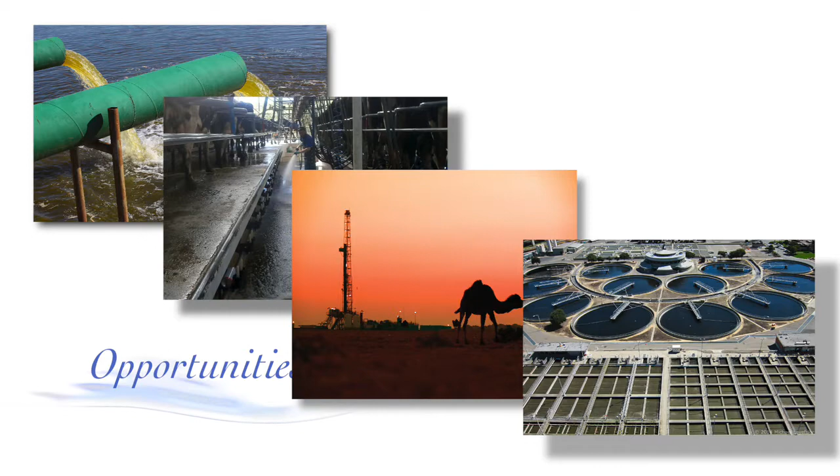Opportunities are mind-boggling. Water from industrial, agricultural, oil and gas, and municipal treatment facilities can now be cleaned and repurposed as needed. The ability to clean water is limited more by our cultural perceptions than by our technological abilities. To be frank, we could take industrial waste, biologically consume the organic matter out of it, and convert it to drinking water.

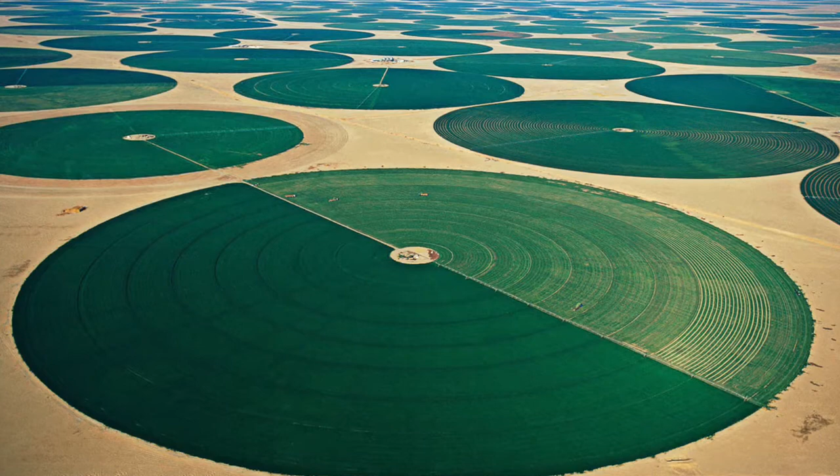It would be safe, have no odor, with minimal filtration, would be crystal clear, and indistinguishable from bottled water. Produced water, water that is a byproduct of oil and gas production, can be remediated and redirected for use as irrigation, potable, or even ultra-pure for industrial purposes. This is not science fiction. We've been doing it for over 20 years.

Zero discharge, our two favorite words. Many countries are presently enacting regulations requiring limited or zero discharge for industrial water. TMD's customer list is a who's who of industrial titans worldwide, some of which we are presently working with to meet these stringent government standards.

We can demonstrate this process and how it will save you money in both energy consumption and disposal, as both are reduced by a factor of approximately 50%. Let's take a look at the process to help you understand how TMD can save you literally millions of dollars and save our environment millions of tons of waste.

TMD has completed preliminary engineering plans for Saudi Paper Manufacturing. Our brief inspection of the facility confirmed our analysis that there will be substantial savings available by the patented TMD technologies. One of the major advantages of the TMD system is the ability to clean and repurpose water. Of course, each level of remediation has a higher dollar cost, but overall, the TMD processes are vastly more economical than present chemical or activated sludge systems.

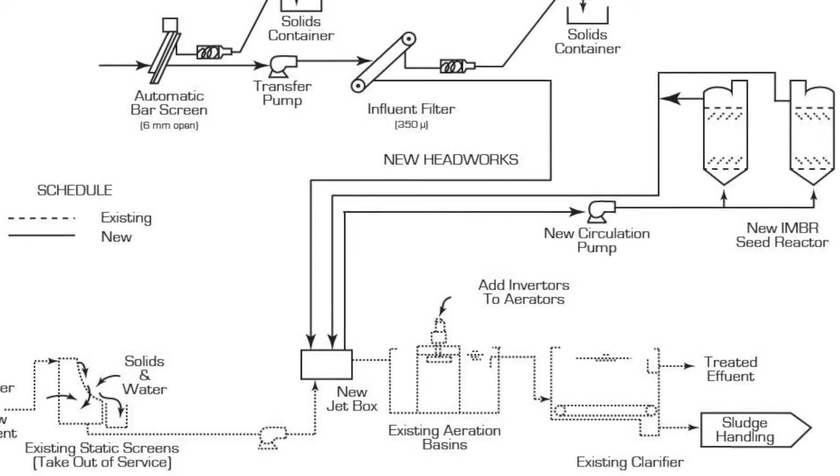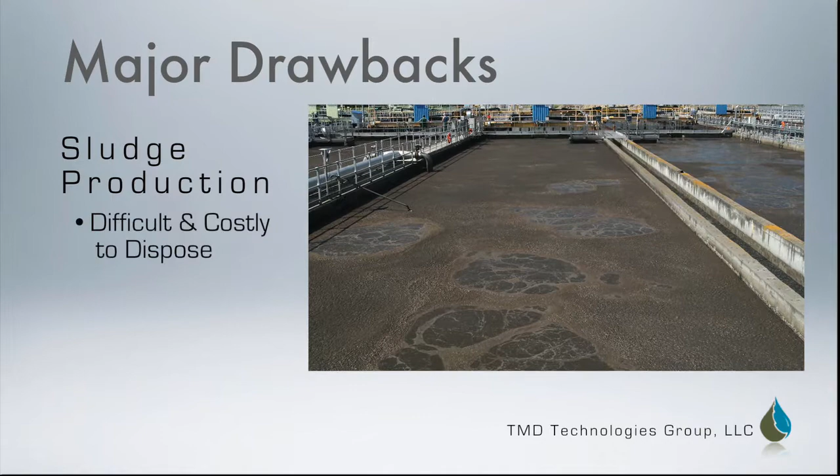A major drawback to conventional remediation systems is they produce substantial amounts of sludge that is often difficult and costly to dispose. This is not the case with TMD technologies. By matching the contaminants to our vast repository of over 11,000 microorganisms, we can virtually eliminate all of the organic matter in a waste stream.

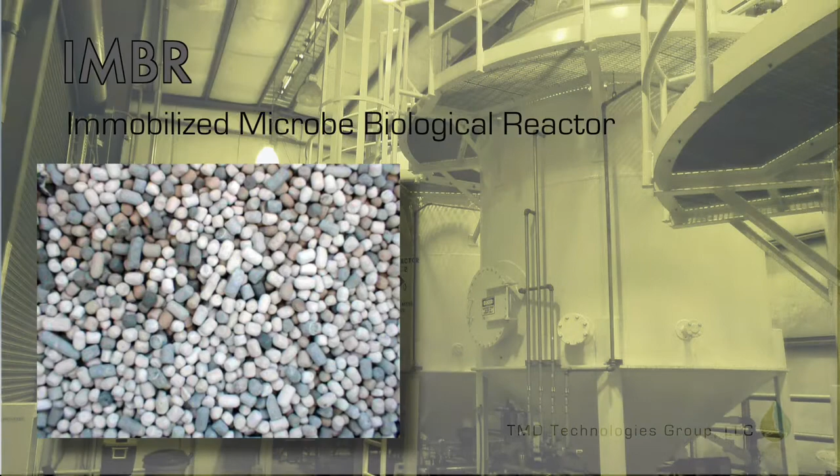Unlike activated sludge systems that require large amounts of decaying microbes to provide living space for their biological agents, the TMD system permanently immobilizes our biologicals in our patented IMBRs. This results in 100% engineered contact and eliminates the need for activated sludge. Our systems are also self-regulating in that if there is not an adequate food source, the microbes become cannibalistic, and if the food source becomes depleted, they will go dormant but will not die off.

Therefore, the only measurable byproduct in a properly operating IMBR should be inorganic solids such as sand or plastic. In short, we provide safe and self-policed condo living for our microbes, while other systems are slumlords.

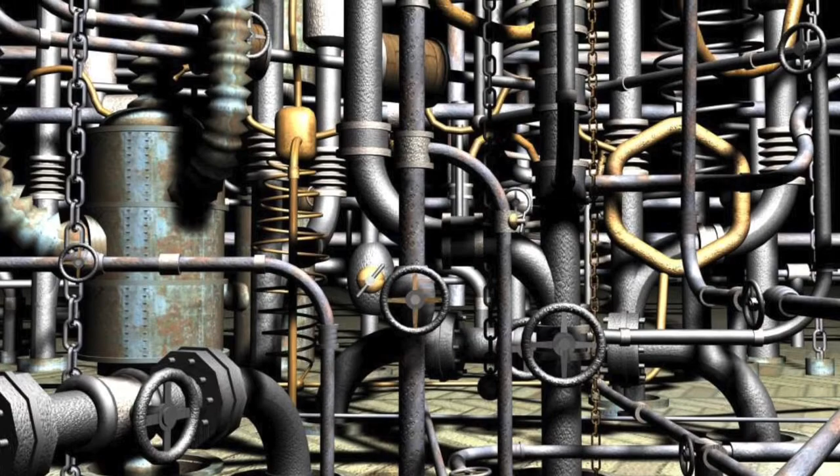TMD's strong suit is system simplification. Many systems installed all over the world in the past 20 years have been made incredibly complex due to available technology of the times. TMD's mission is to analyze a system and replace chemical and mechanical activity with biological activity wherever possible. This approach simplifies all waste systems, saving time, energy, labor, and of course substantial money. Again, biologicals consume, mechanical and chemical treatments simply mask.

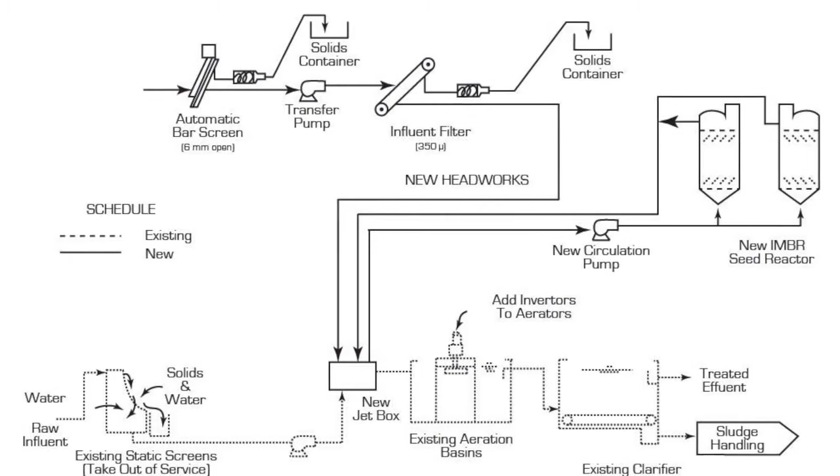Although TMD representatives were only able to conduct a preliminary analysis of Saudi Paper facility, this analysis, in conjunction with years of experience with similar systems, leads us to suggest very conservatively a minimum of 50% reduction of solids. In TMD systems currently in operation, we have reached levels as high as 98% reduction in organic solids.

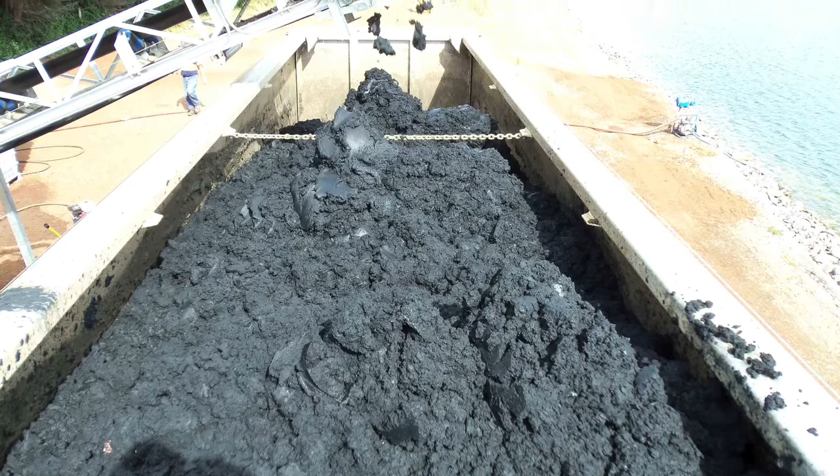In the case of Saudi Paper, this would convert to approximately $2 million savings annually by the reuse of the water and virtually eliminating the need for solid waste disposal. In short, the only solid waste to be dealt with would be inorganics.

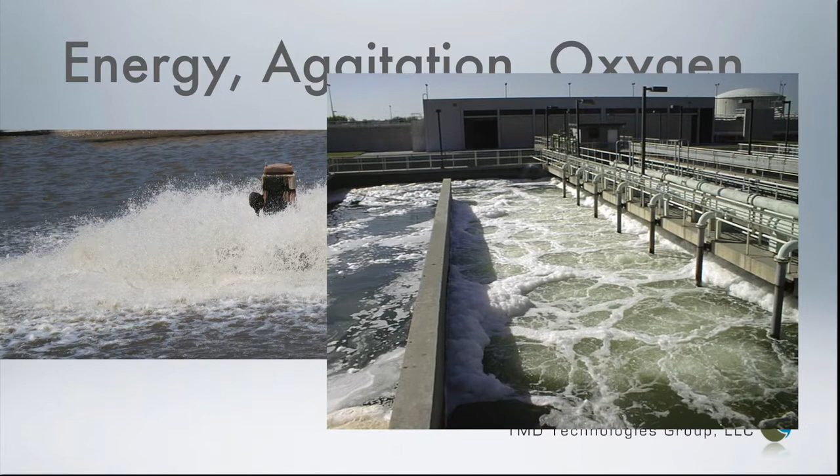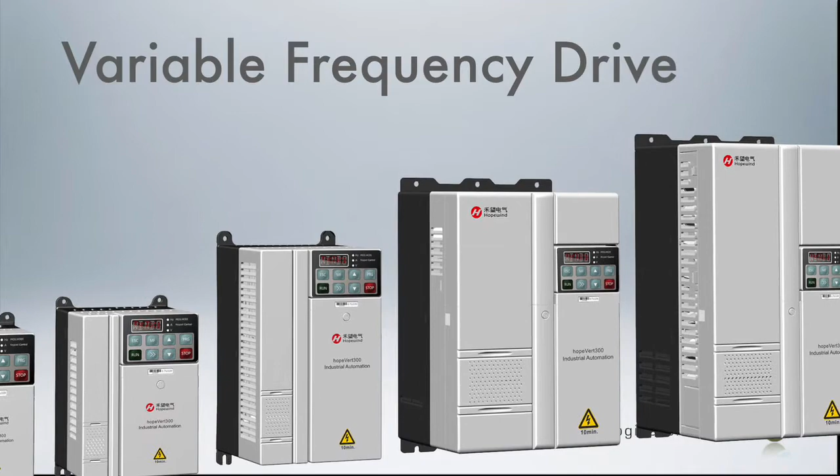The IMBR system consumes a fraction of the energy, agitation, and oxygen required by the present system. This allows for substantial reductions in power consumption through elimination of unnecessary stages. It also allows for the installation of variable frequency drives that offer tremendous energy cost reductions: 50% reductions of biosolids, 30 to 40% reduction in power requirements.

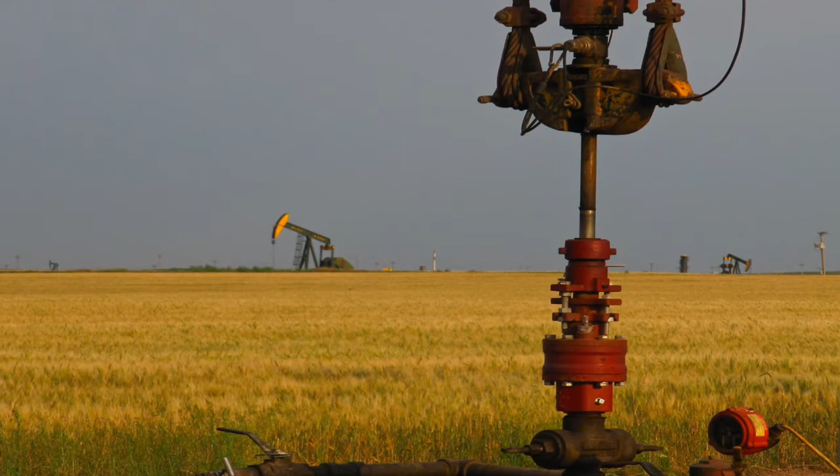TMD's technology produces sustainable, environmentally sensitive, and an economically viable operating environment. Our technology is infinitely adaptable and able to meet the challenges presented by industry, municipal, oil and gas, agricultural, and other industries' waste streams.

Unlike conventional waste treatment systems, TMD has the knowledge, the resources, and above all, the biological inventory to select a toxin-specific organism. Essentially, TMD's approach is to identify the toxins in the waste stream and then match them with the specific organism from our vast U.S. repository. TMD's lab has the ability to recreate virtually any combination of contaminants.

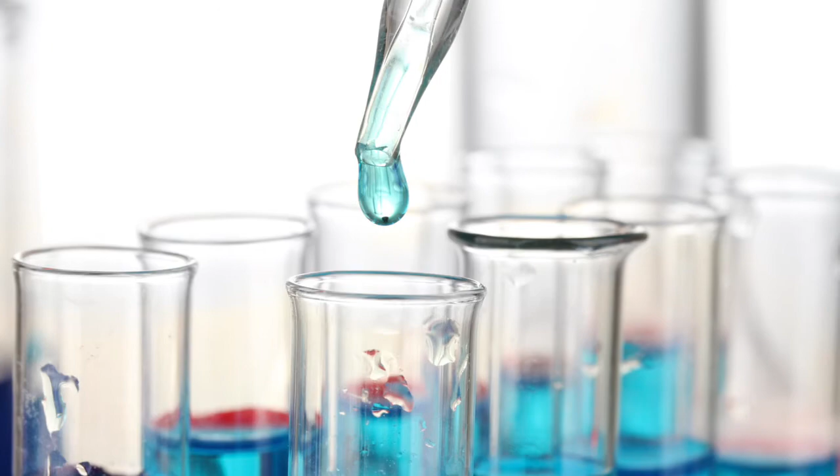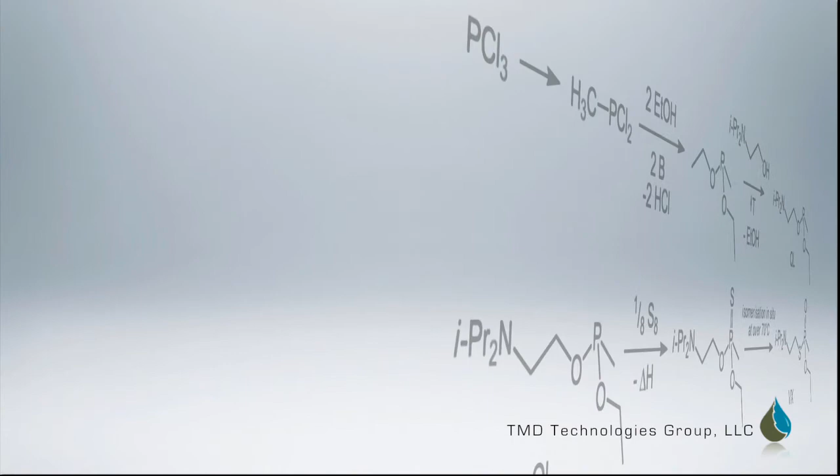We then confirm our biological selection by a real-time test of the effectiveness and efficiencies of the chosen microbes. This is all done prior to the immobilization of the biological agent in the IMBR. All TMD IMBRs are tested prior to deployment to ensure maximum efficiency.

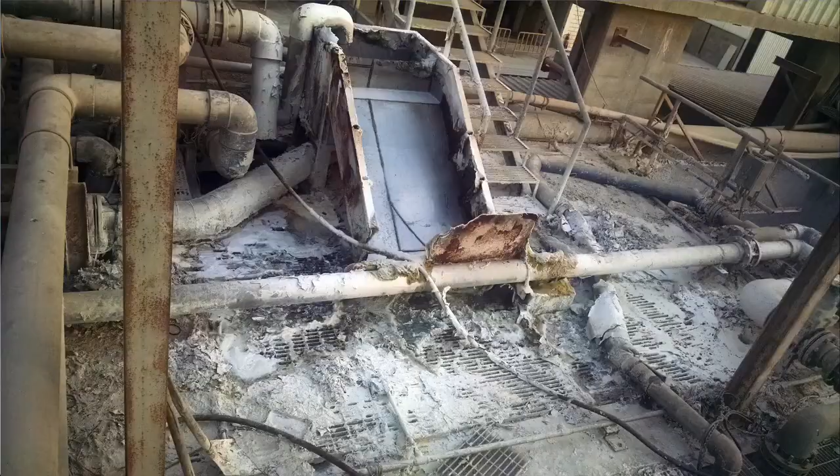Clearly, the Saudi Paper system was state-of-the-art at its inception. However, due to technological advances, many of them developed and patented by TMD, the operation and efficiency of the existing plant can be vastly improved.

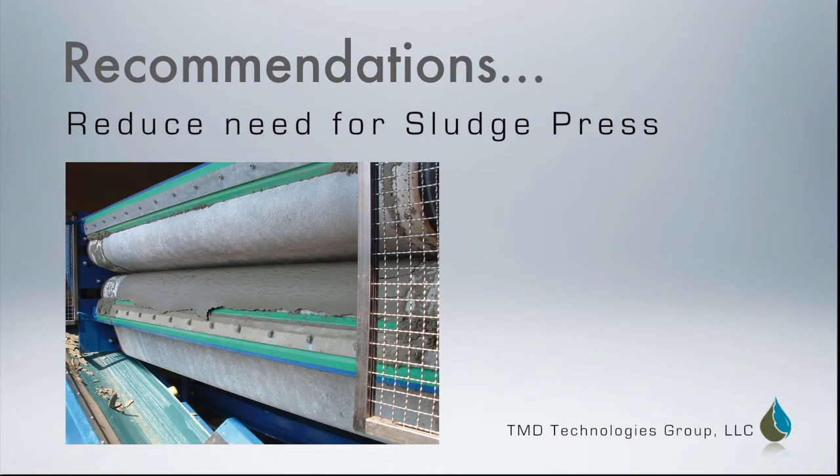Our recommendation would be to replace or repurpose several components: replacement of influent static screens, repurposing or elimination of primary and secondary clarifiers, elimination of sand filter, vastly reducing the need for sludge press. Additional savings could be realized by the addition of foam suppression spray and inverters on fixed aerators.

Everyone endeavors to fix the environment, but it is typically cost prohibitive. With regard to the Saudi Paper operation, not only can the plant be an incredible environmental steward, it can also simultaneously save millions of dollars.